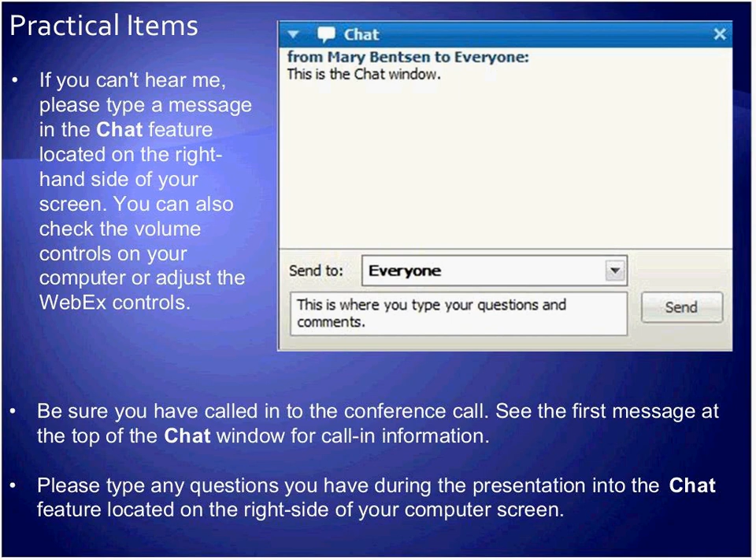Now, to get started, I'd like to hear from you what city you're calling in from today so we can get a feel for where everybody's at. I am in Peoria this morning. We have someone from St. Louis, someone from Champaign, Illinois, Knoxville Tennessee, Greenville, Peoria, Marcells Illinois, Springfield Illinois, St. Louis. Well, thank you all very much for joining us this morning from all over the state, and one from Tennessee.

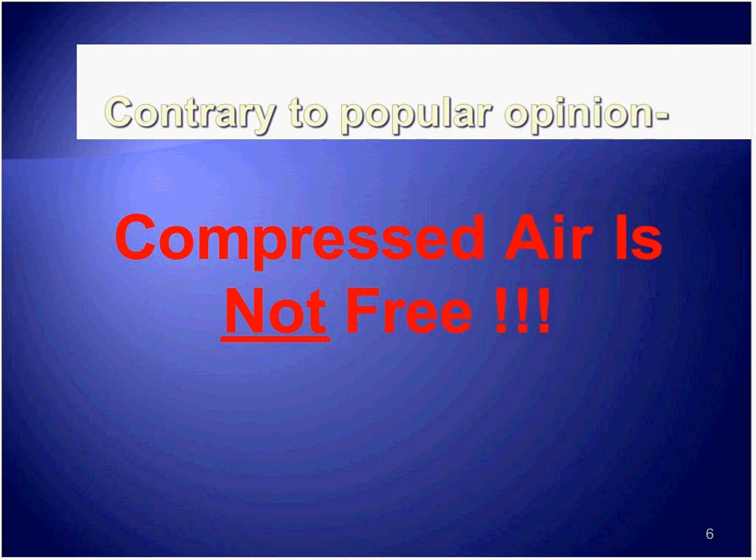See from this that we have quite a few different things where compressed air is really losing most of the input power. The greatest portion of it, at least 80% of the input power, is going to heat. So we have a problem where only 20% is delivered as compressed air. It's a very inefficient transformation of electrical energy into pneumatic power. We have a problem with that, and if we understand where it's going to heat, and if there's an opportunity to recover that heat, that's a great opportunity to really reduce our overall energy costs.

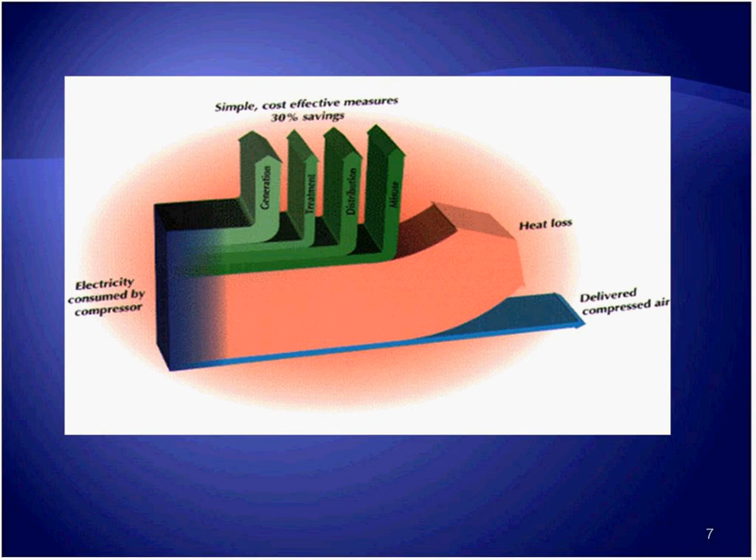You could possibly turn control over it to me. 10 to 15% of the input power gets to point of use. The rest goes to other things—we're treating the air, getting distribution pipe losses, miscellaneous losses, and so many other problems in the compressed air system. So we're saying approximately 10 to 15%, though we've had systems where it's less than 10%. We're constantly looking to reduce the consumption of compressed air and get a proportionate reduction in the input power to the compressor.

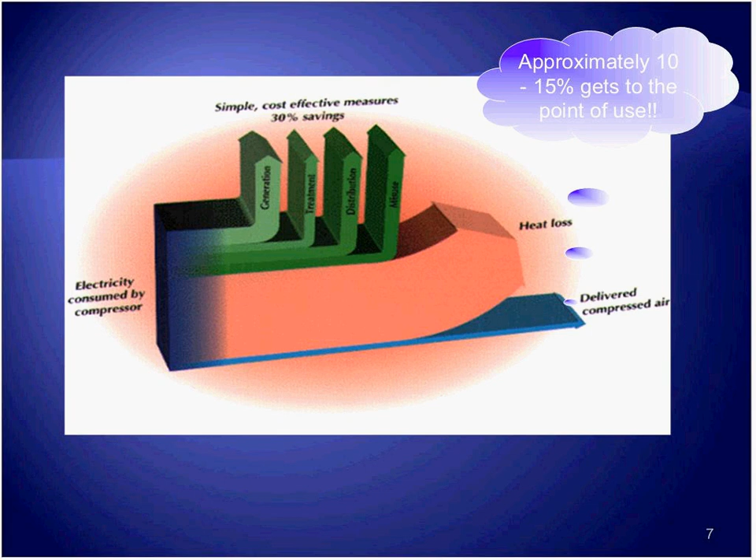When we evaluate the 10-year life cycle cost of an air compressor—this was done quite a few years ago, and we had it updated to make certain we were still on the same page. We had some problems with whether these pie charts were still accurate, so we had them done again, calling consultants actively involved in the Compressed Air Challenge. While prices have changed, the ratio of these things hasn't.

You can see that over a life cycle cost, the greatest cost is the electricity cost, which too many times you'll find purchases are based on the bottom line price, while equipment is only 12% on a 10-year life cycle cost basis, and maintenance is an additional 12% over the life of the compressor—let's call it 10 years. So we can see that the real opportunities are on the electrical energy side.

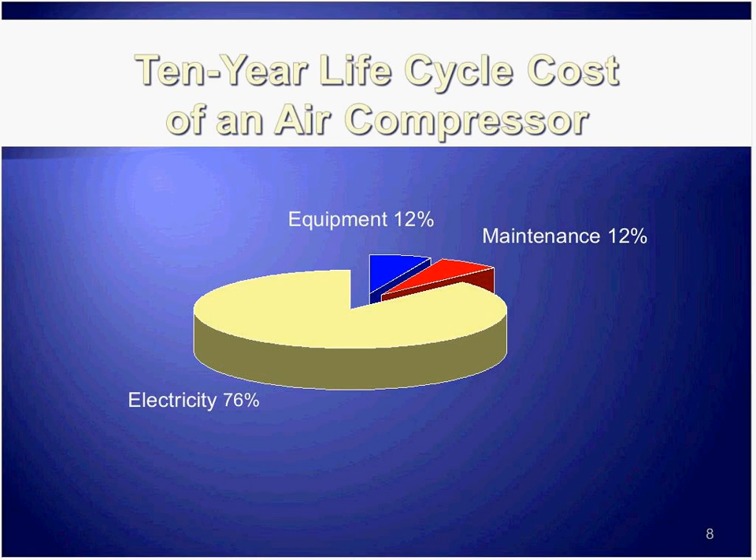Versus other sources of energy, something we look at—we've already covered that it's as low as 10 to 15%. It's a very real part of most plant operations. There's almost no manufacturing process I've seen that doesn't require compressed air, and I've seen all types of operations, whether it's an oil refinery, something that converts bauxite to alumina, a stamping plant, or tile mills. Savings of 20 to 30% are very possible.

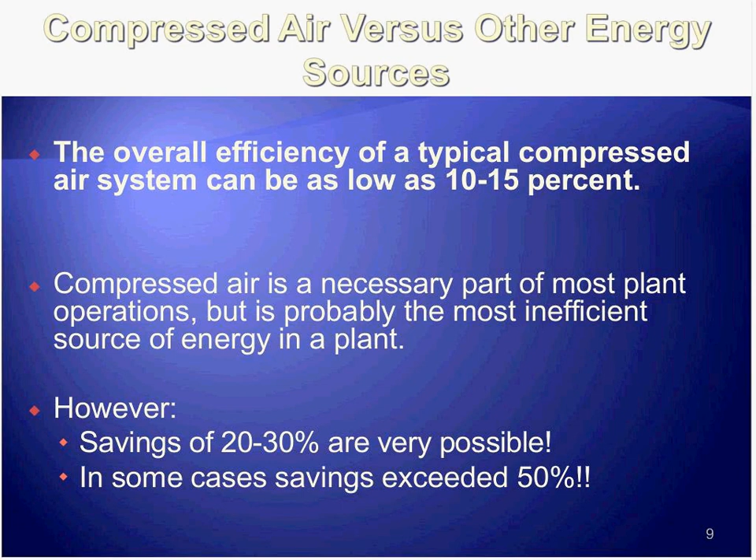In some cases, savings exceeded 50%. We have cases where a plant was running a 350 horsepower air compressor, and just by changing the use of compressed air and using another source of power, that plant today runs with a 75 horsepower compressor operating at about 80% of its capacity—so they're operating at 60 horsepower when they used to run 350 horsepower. Things like this are possible. That's an unusual case I just mentioned, but it does indicate that it's possible.

The cost to generate compressed air—in almost all of the plants I've been in and done audits, not all, but many don't know what the input power is and what the output CFM, cubic feet per minute, is. So output over input is efficiency.

For the system, we already know, as shown in the pie chart, the energy cost exceeds any other cost. Another thing to note: the annual cost will generally exceed the purchase price in the first year.

Take a compressor with a capital cost of $40,000 for 100 horsepower. At 8,000 hours of operation, the energy cost is $55,900. We used 8 cents a kilowatt hour, but if yours is more or less than that, you can ratio that number.

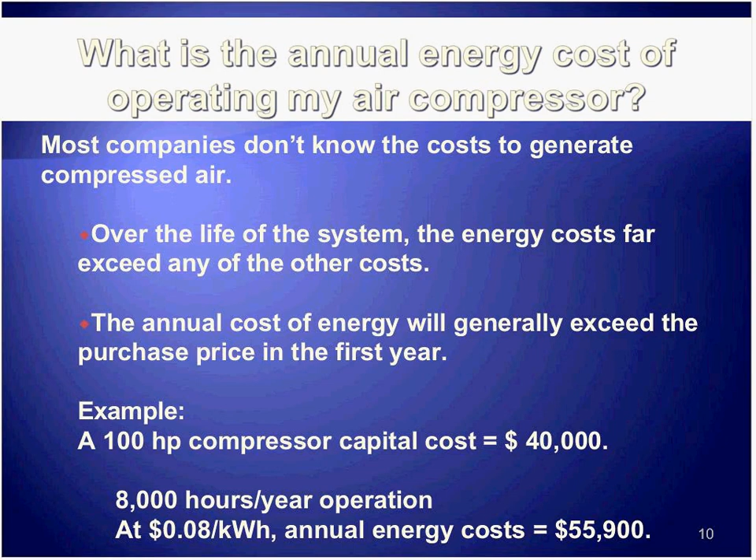It's simple—regardless of what size compressor you have, you can list what the cost is, and at the bottom we've noted again that this uses 8 cents a kilowatt hour. If you want to approximate the cost of your compressor operating at full capacity, full load, at the design pressure, 8,000 hours a year—for example, take a 100 horsepower compressor.

There's 110 brake horsepower, meaning at the shaft we actually need 10% above motor nameplate. This isn't unusual—rotary screw compressors today, almost all of them, rate above nameplate horsepower, taking advantage of the 15% service factor, so 10% above motor nameplate. So all of these costs are based on being 10% above motor nameplate. If you're operating at exactly motor nameplate, that cost will be reduced by approximately 10%.

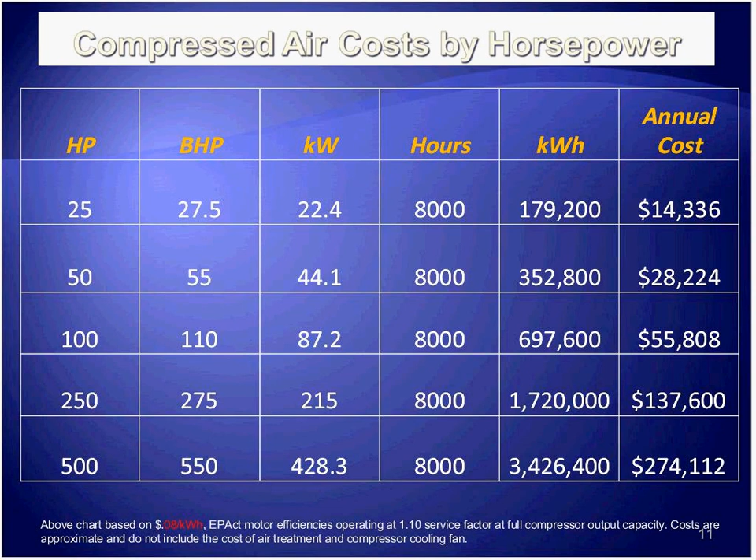So now you have an idea of what your own compressor is costing you. Understanding all these little issues we've suggested a compressor can cost, it's a measurable asset—but of course, if you can't measure it, you can't manage it.

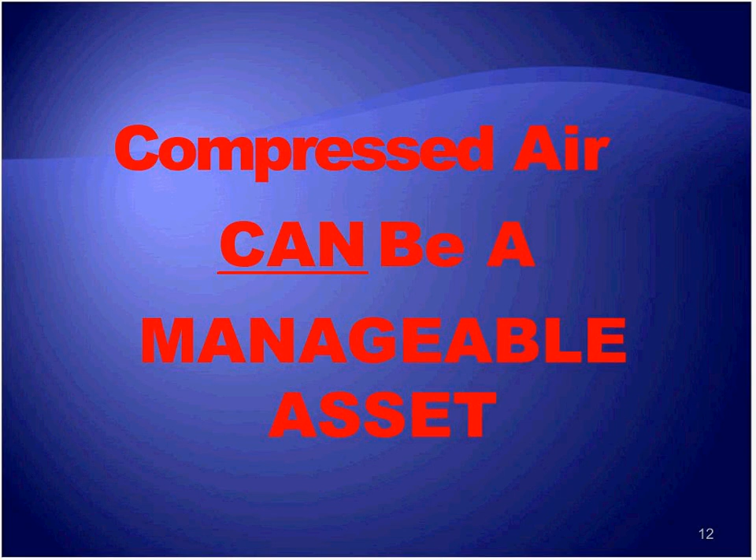On the supply side, what we're looking to do is provide stable pressure and clean, dry, compressed air at the lowest cost. That doesn't mean providing overpressure or dropping to a dew point far lower than what's actually needed. Pressure means higher cost, and dew point means higher cost.

On the demand side, we've included the distribution piping and any end-user receivers at the point of use. The goal is to minimize wasted air and avoid using compressed air for anything potentially inappropriate, while maintaining performance, including energy and reliability. You have to control and address both the supply and demand sides and make that management sustainable.

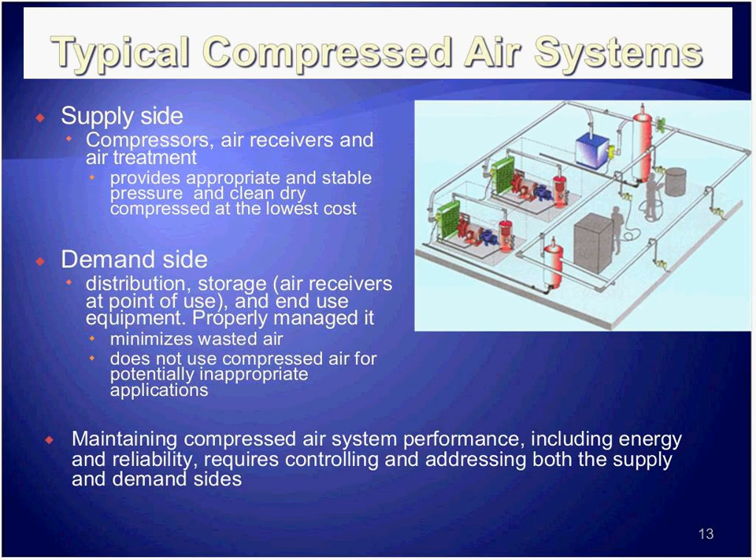The starting point, existing potential problems, and opportunities are found at every point in the system. This is not just about the air compressors—it's a complete system.

Take a look at the air compressors again—we've laid out all the different components: the dryer, the filter, the primary air receiver. That optional pressure flow controller is a pilot-operated pressure reducing valve. They're rather sophisticated, maintaining line pressure at a given point regardless of what the pressure is upstream on the supply side.

In some applications, many plants want to stabilize their pressure and keep it within plus or minus 1 psi. They're able to do this with a pilot-operated regulating valve, but it means operating at a higher pressure upstream, so you have to weigh the benefits and cost to justify it.

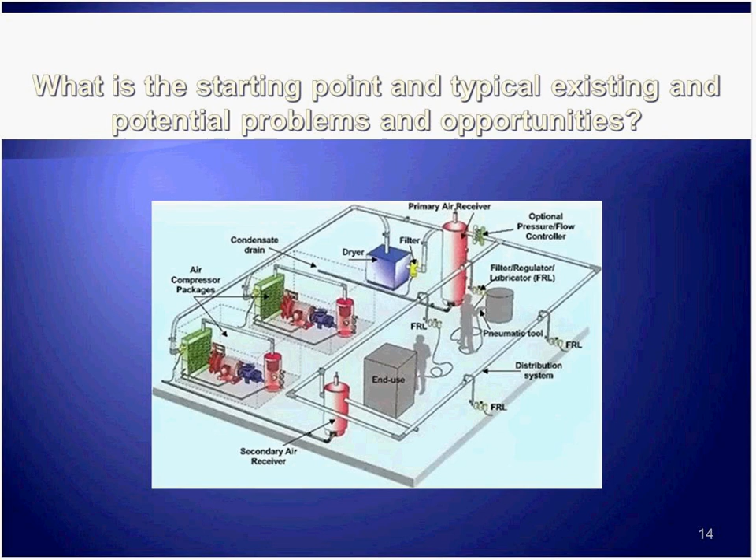This was identified as a major opportunity in the late 1990s by the Department of Energy, when the Compressed Air Challenge was formed. People didn't realize how expensive it was to produce and use compressed air. This lack of information has been a barrier, but there have been substantial improvements in the industry since then. Some of what Ameren is doing today is creating better awareness among the public—that's the biggest problem.

When people are aware of the cost, very often we'll find that consumption is reduced, and the energy cost to produce it is reduced as well. We just need more people aware of what it's costing us in the misuse of compressed air. For example, a company now operates with a 75 horsepower system that was previously running at 350 horsepower.

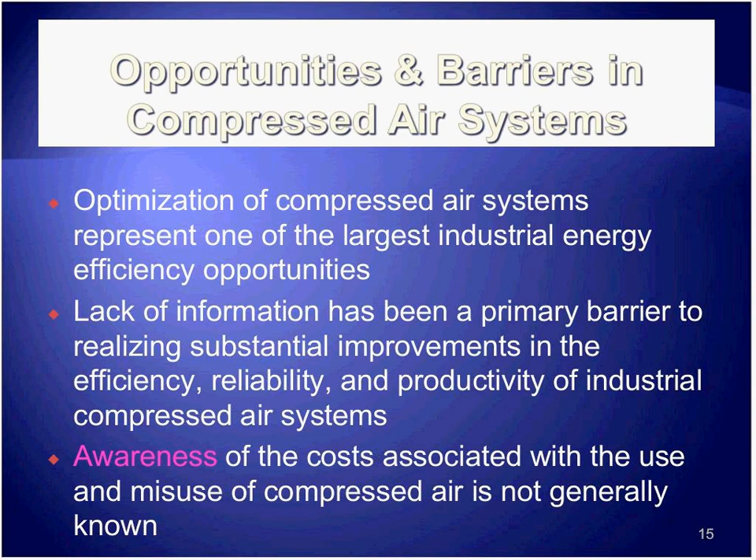If we change something, we need to see if there's a risk to production. If you're going to reduce the pressure, say by 2 psi, production may look at it askance and say, 'Wait a minute, that's going to harm my production.' Well, maybe it will and maybe it won't. So we want to coordinate with production before making any changes, telling them we're running a test to see what happens.

Lower pressure will result in lower costs—we'll get into that a bit later.

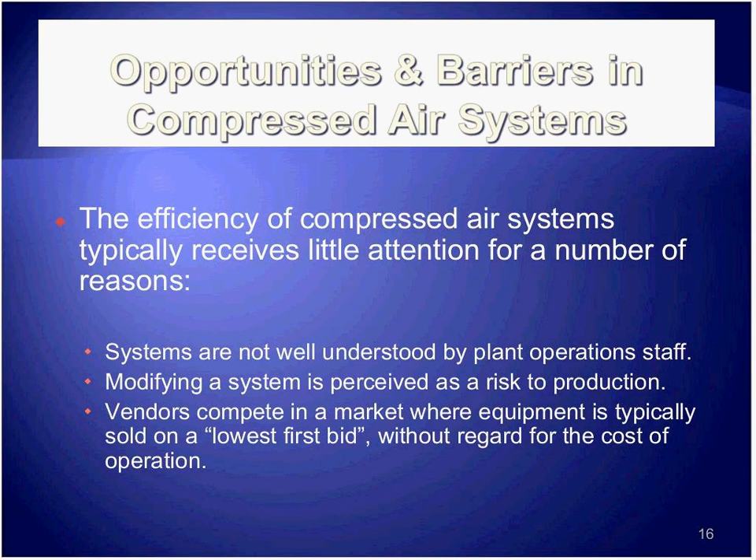You can't manage what you don't measure. Establishing a baseline before implementing any changes is essential.

Do I start with the supply, demand, or distribution? That's a good question—let's get back to the first one. If you know what kW is, the input power, and your total kWh over a period of time, and your operating hours, then you'll begin to understand what it's actually costing you. Then you can say, okay, if I implement a change, what change resulted in savings? So the baseline becomes important as your starting point before making simple changes—the low-hanging fruit.

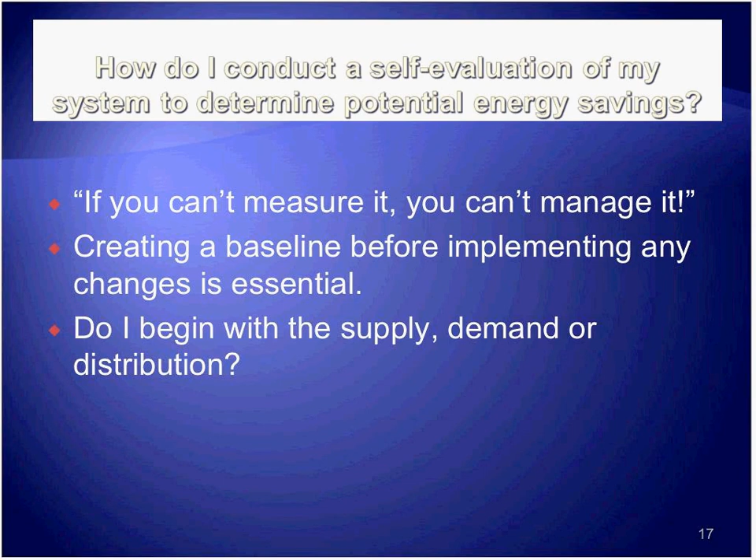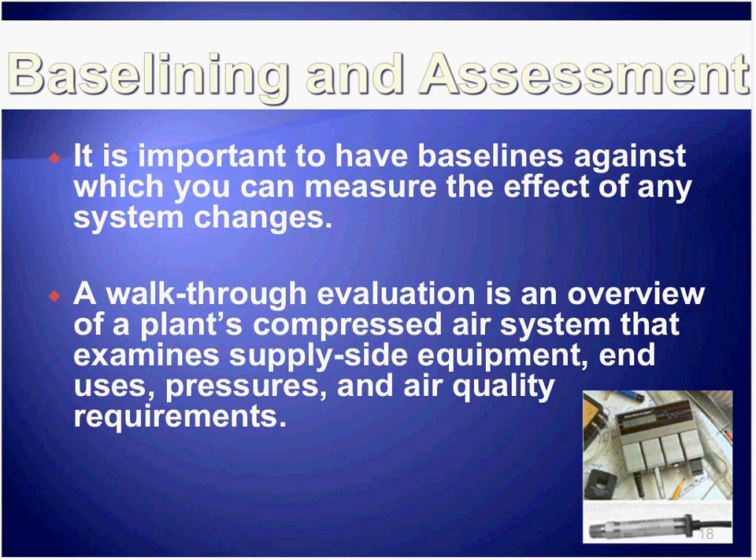For the evaluation, you can look at the whole system—the supply side, the end uses, the pressures, and the air quality requirements. In the lower right-hand corner, we're seeing a data logger, which records the information you may be monitoring or measuring, whether it's kW, CFM output, or other consumption data. We've got that data logged.

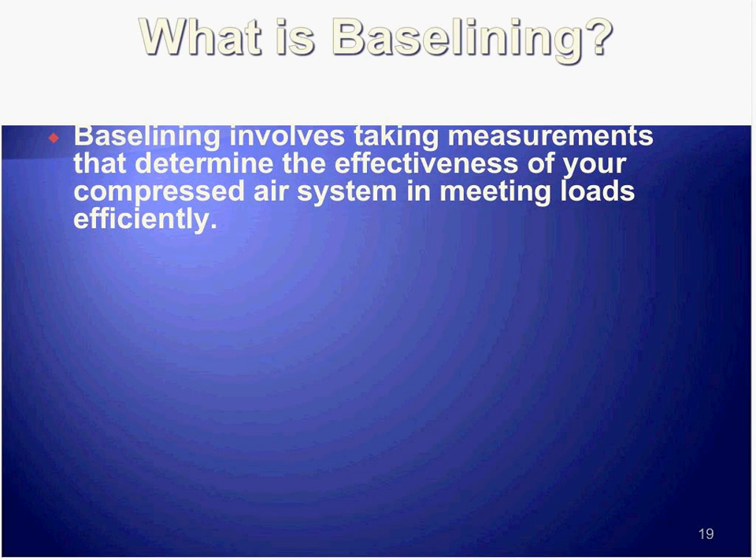We normally look at energy, whether you do it weekly or monthly, and of course it might vary seasonally depending upon the season of the year and what the manufacturing loads are, and whether it's first shift or third shift.

And flow will tell you basically what the leak load would be, though sometimes there are variances to that, and you have to know your equipment to know some of the production is kept pressurized for various reasons, even though you're not producing anything. At that point, while it may be considered a leak, it's non-productive use, you must keep the air on. There are applications like that. Instrument air might be an application I mentioned.

Before making changes to the system, the question is why? Well, you know exactly what resulted from that change. So you take these measurements both before and after.

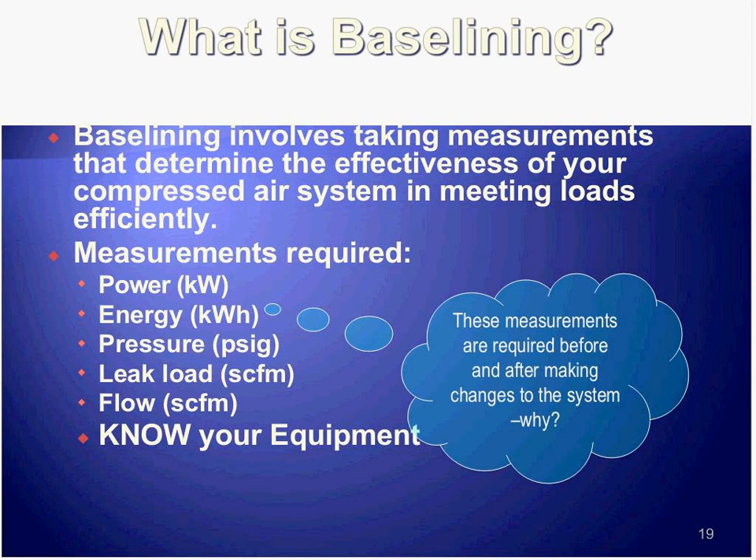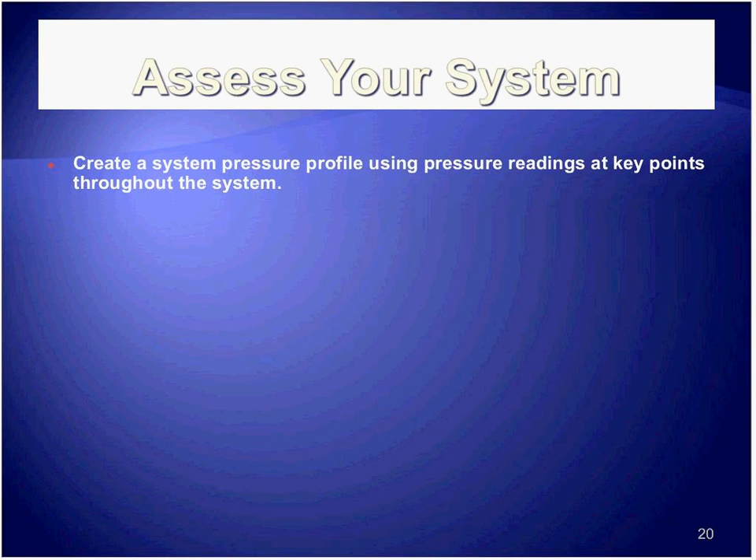The key points throughout the system - some people want to change the distribution piping because they think they have pressure drops at the end of the system, but it's not their piping that's the problem. It could be an end use where they have a clogged filter - minimizing pressure at the end use combined with a corresponding reduction in compressor discharge pressures.

So if you could find that at an end use, you were operating at an elevated pressure at the discharge of the air compressor because this end use had a large pressure drop in some of the components, if you reduce that pressure drop at the end use, could you reduce the discharge pressure at the compressor and reduce your energy input cost accordingly?

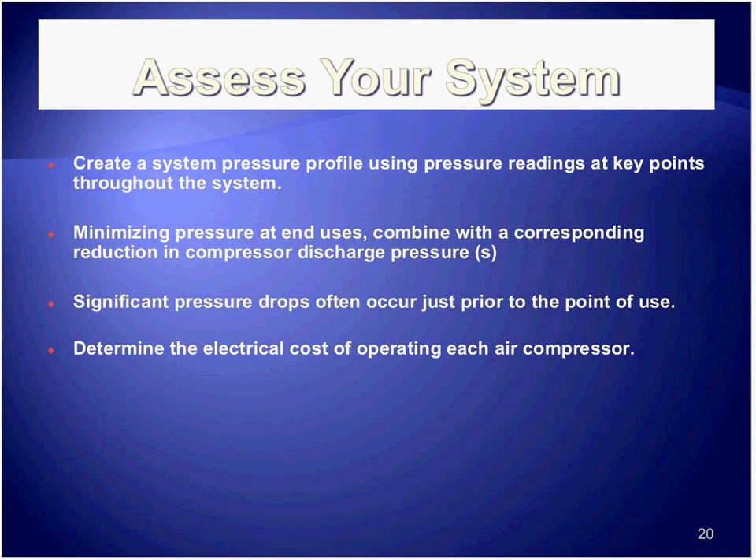They occur just prior to the point of use. We find that many of our problems are right there, right at the end use - they're not anywhere else. We call it the 'dirty 30,' the last 30 feet of piping coming into the end use, is where we find problems, whether it's a filter regulator lubricator - filter being a prime example - or some of the internal piping at a particular process, or incoming distribution of hoses or tubing or whatever.

Which tasks can most easily be done? Start with the easy ones. Then perform these tasks one at a time - measure the effects of each and see what the effect is on reducing your cost as you implement each individual initiative.

Air at the lowest possible pressure - that's the rule of thumb, on a rotary screw compressor and some of the reciprocating compressors, not necessarily on centrifugals, which we can discuss at a different time - if you can reduce the discharge pressure at the compressor by 2 PSI, you reduce the input power by about 1%. If you can reduce the pressure in the system by that PSI, you get almost a 1% reduction in the consumption of compressed air for everyone using full line pressure.

Component demand - notice that this pie is really that 20% of the total input power that's converted into pneumatic power. And of that 20%, only production uses 50%. Leaks account for anywhere from 10 to 20%. I'd say in today's world, because of everything that's been written, probably 10% or less in most of the plants I've seen most recently, although there are still some that go above 20%.

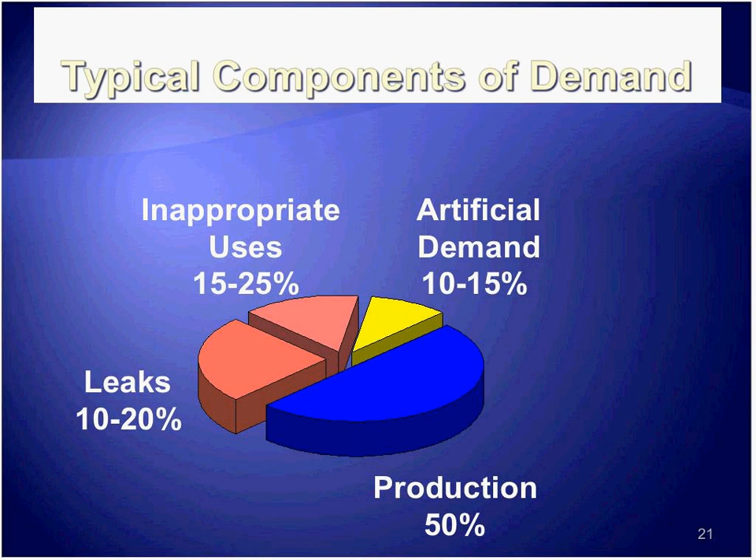Inappropriate use is 15 to 25% - that we can eliminate or replace compressed air with some other source of power. Artificial demand means the elevated pressure you have put into the system because some process or some component requires that elevated pressure, so you have the entire system operating at a higher pressure, and therefore everyone in that full pressure is consuming more compressed air than they would at the low pressure. That's called artificial demand.

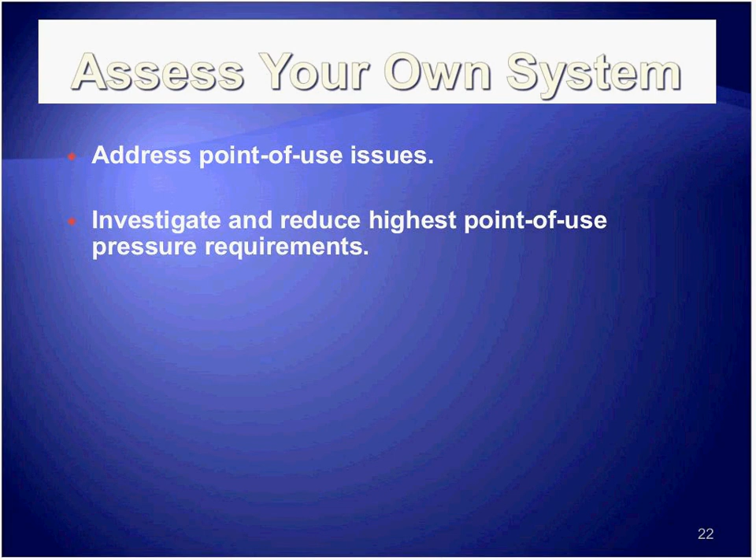The point of use issues: reduce the highest point of use pressure requirements, determine the actual air quality requirements, treat air appropriately. This means if you have a dryer giving you a minus 40 degree dew point and you only need it for one purpose in the entire plant, maybe an outside piping system, that doesn't mean the entire plant should be getting minus 40 degree pressure dew point, when a 35 degree dew point might be adequate.

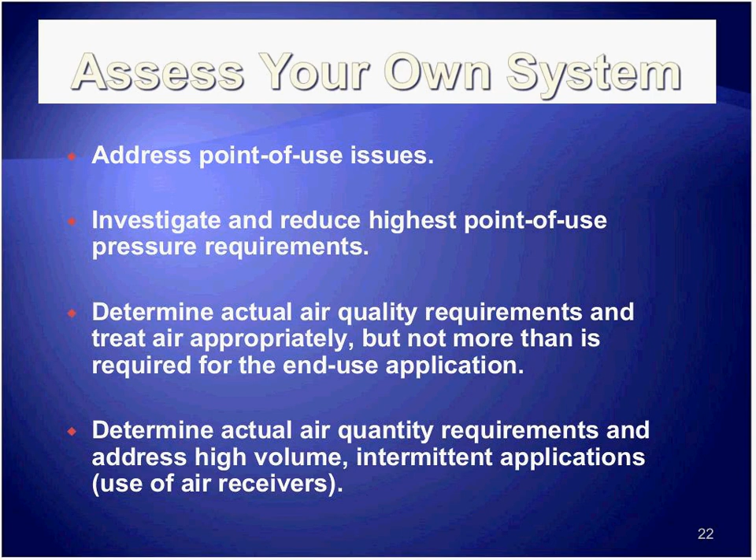Address the air requirements for high volume intermittent applications with an air receiver. If the plant pressure is used quite intermittently, once or twice during the day, maybe just adding a storage receiver at that point of use would eliminate the reduction in pressure that the entire system is seeing.

Point of use requirements, especially those that require high pressure or have a high volume requirement for an intermittent application.

Examples where gauges were changed, and somebody, because we knew that the old gauges were inaccurate, they were reading higher pressure in the system downstream of the air compressor room. So those gauges downstream were replaced, and production complained that we had reduced their pressure in the system, when in fact we hadn't. We had just fixed the gauges.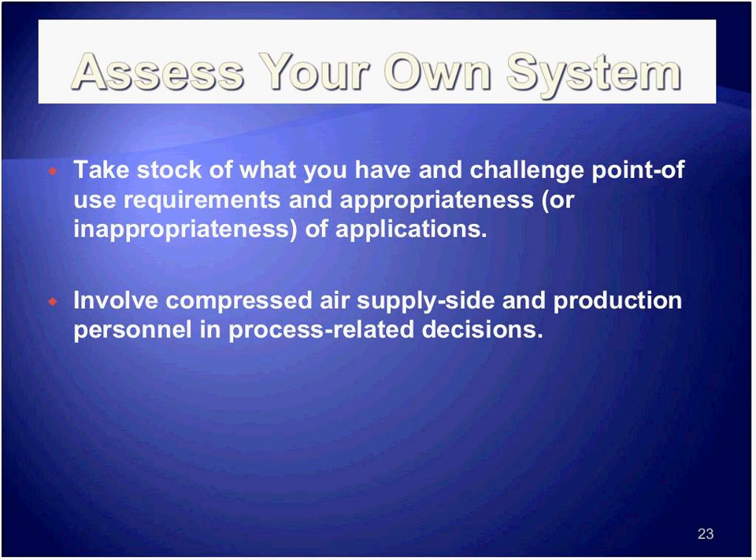Keep them fully informed. Let all management know what the dollar savings are. That's really where the chief financial officer has a key interest, and sometimes he can be the greatest partner in order to improve the compressed air system. Sustainable quality and reliability is the goal.

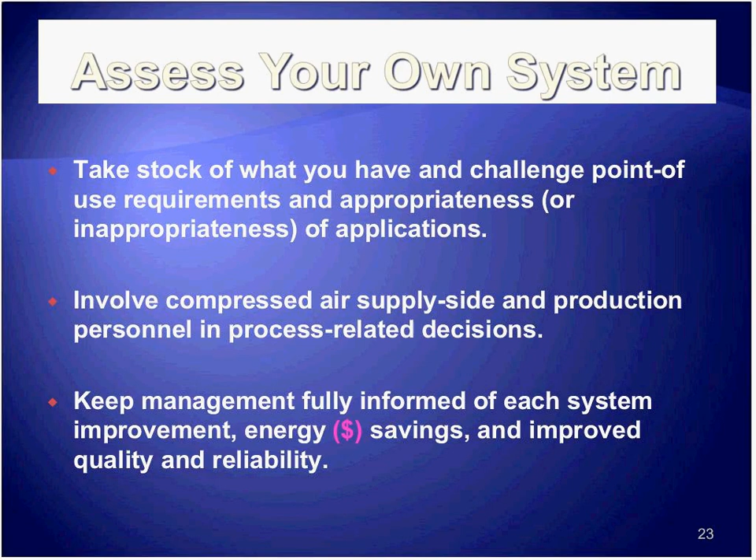This rule of thumb I just told you about: 1% lower input power to the compressor; the inappropriate uses, you fix all your leaks, not just identify them, fix them; and good maintenance procedures throughout. For compressor controls, it's highlighted here.

If we do all of these things to reduce consumption, and it doesn't result in a proportional reduction in the input power and total energy consumed, then we haven't helped ourselves to the point that we can. It's possible to reduce air consumption 10% and get only a 3% reduction in input power, depending upon the type of controls you have on the compressor.

So make sure that, to the extent possible, the controls are always readjusted every time that you have any kind of a change. You may want to call in your compressor supplier, or it's possible you can do it yourself.

Adequate storage, meaning the air receivers, as we stated a few moments ago, especially for high-volume intermittent applications. There are other methods as well.

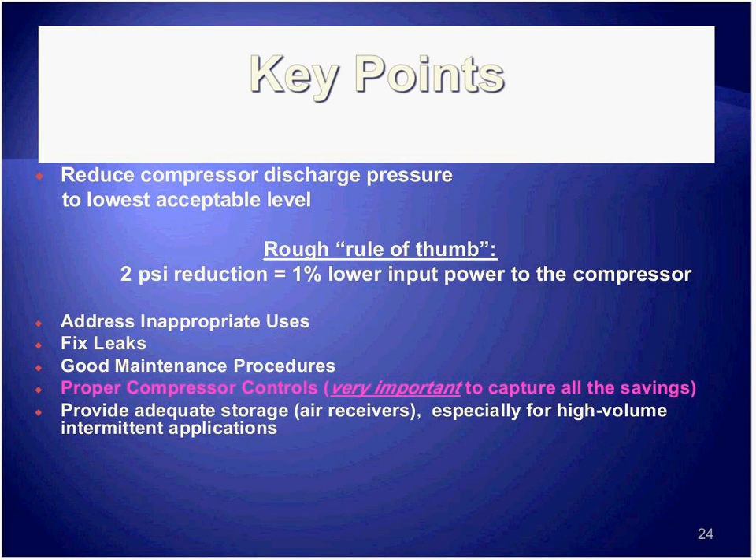Leaks. I've probably seen magazine articles written about leaks, and some of the rules of thumb: low pressure means less leak flow. Leaks mean you should minimize the supply pressure. Unregulated end uses will use more air when pressure increases.

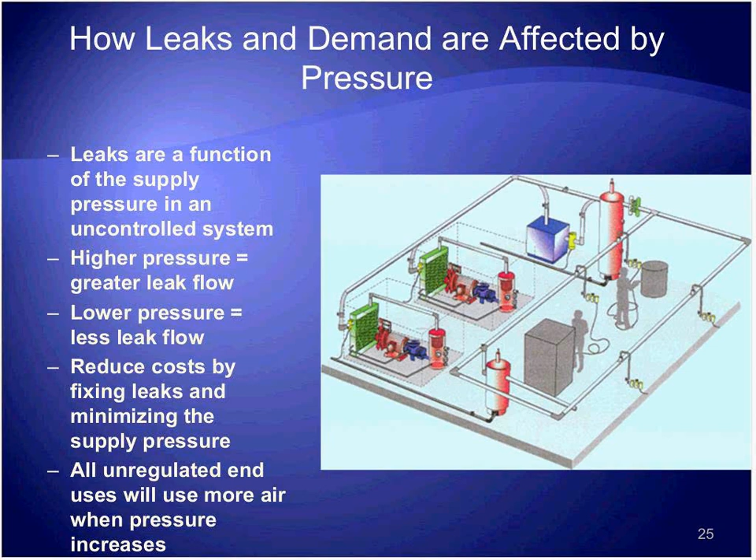This tabular form, the purpose of it is to show that at the pressure, for instance, if you go to 125 psig, 126 CFM. Now, a perfect orifice—very few things are perfect in life—and most leaks do not occur in a perfect orifice. They occur in many different shapes, but a leak equivalent to a quarter-inch orifice would consume 126 CFM. Yet if we drop that pressure to 100 psi, the same orifice consumes only 104 CFM. At 90 it's 95, and at 80, 85 CFM.

By reducing the pressure in the system, the air compressors don't know whether they're feeding a series of many orifices or feeding all the processes that require compressed air. So by reducing the pressure to the system, across everybody using compressed air, you'll find that's the reduction we're able to get. If you can reduce from 100 down to just 90, you really reduce consumption by about 9%.

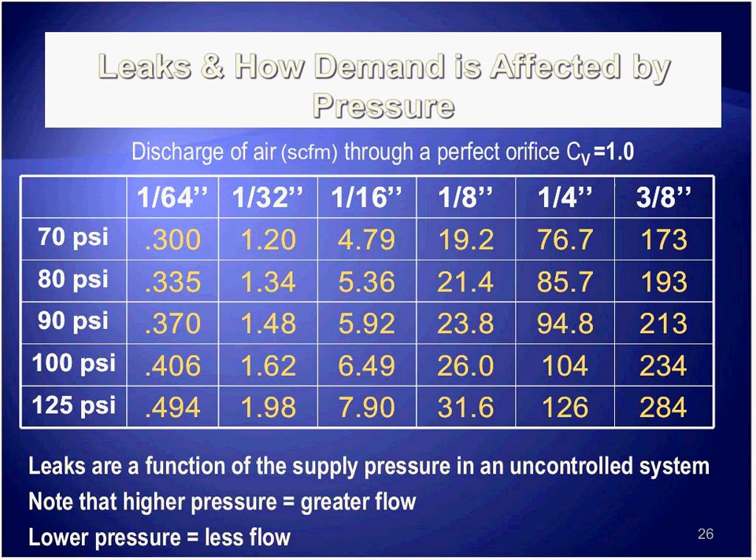That's cost at 8 cents per kilowatt hour.

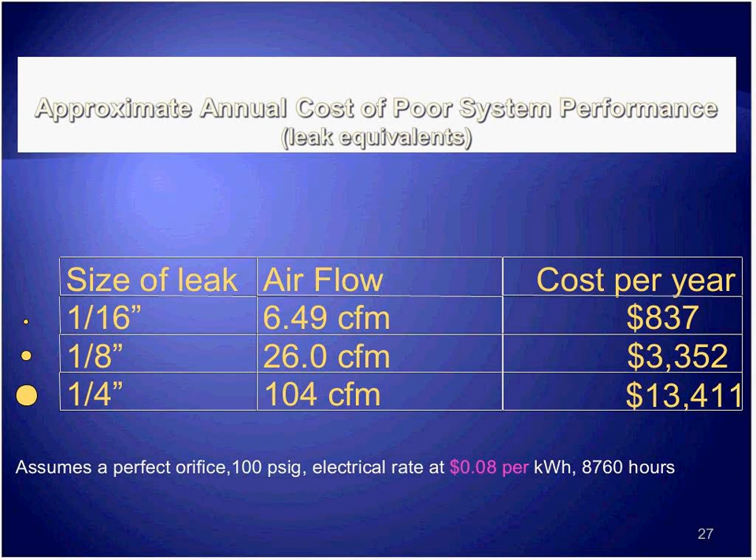They told me... $13,411 is more than your yearly pay, but I'm not so sure of that.

Did you laugh because it isn't? I don't think so. You don't think so?

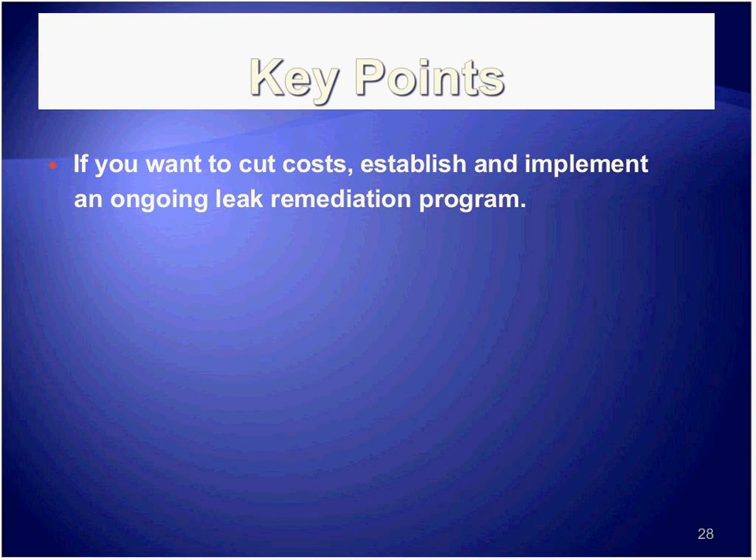Okay, if you want to cut costs, you've got to implement a leak remediation program. It's not something you do once and it's over, that's the end of it. It's ongoing. Production will always tell us where we have leaks, or maybe they're responsible for fixing their own leaks, but is that the main thing they're supposed to be doing? Sometimes it isn't. It's not the priority.

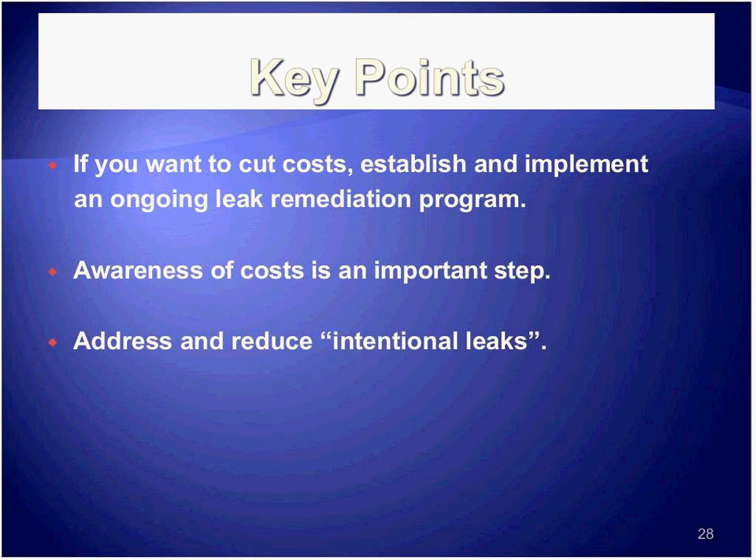Again, the awareness of costs is an important step. Intentional leaks mean somebody has taken a piece of hose or tubing and put it on a conveyor line, as an example, just to help move that product along when there was nothing wrong with the conveyor line when it was new, but something's changed, so they use the air as an assist. That's an intentional leak. And when the conveyor line stops, does the air stop flowing? Sometimes it doesn't—the compressed air continues to flow even though no production is taking place.

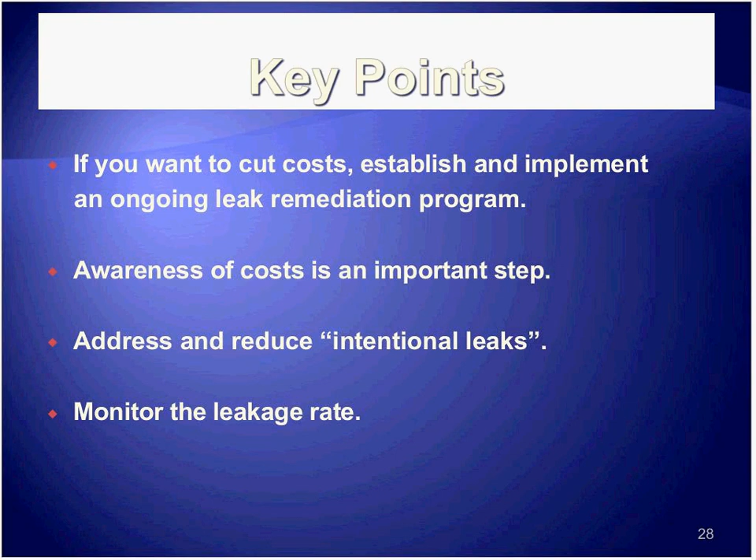The leakage rate—this we talked about.

Calculations of reduced compressed air consumption: if your compressors are not capable of taking advantage of that, sometimes we have centrifugal compressors where any excess capacity is just blown off to the roof. So you can eliminate all the leaks and you haven't reduced your energy, because all that reduction in compressed air consumption only resulted in the centrifugal compressor blowing more air off to the atmosphere than it had been doing before. So I want to make sure the compressors are controlled properly.

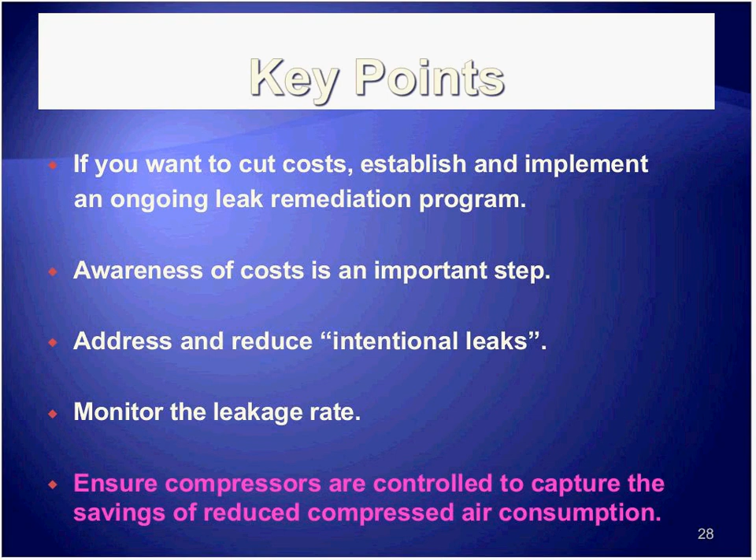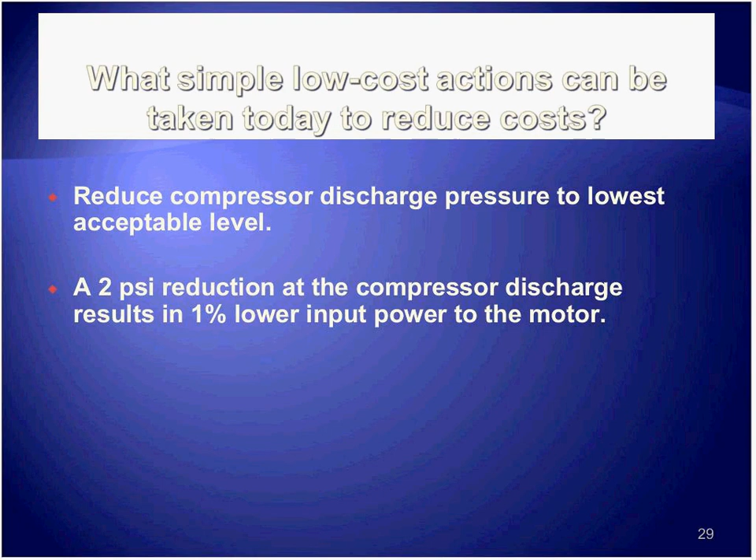Just things that we wish to continue to reinforce. At the end use, there are leaks sometimes on the supply side, in the air compressor room. We've found some plants where it's really been significant, but most leaks are at the end use.

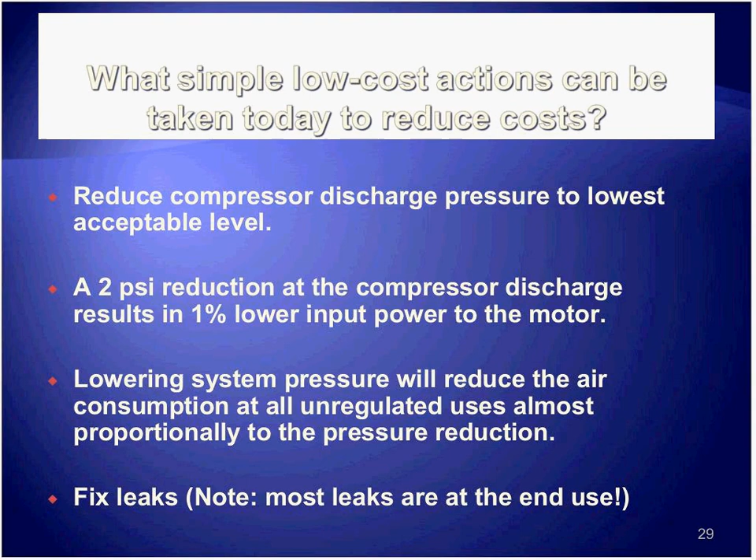Again, maintain system pressure at the lowest possible levels. Reduce leaks to less than 5% of the system flow. It's not an impossible thing. We've seen it in many plants, especially in the last 5 to 10 years. Potential inappropriate uses.

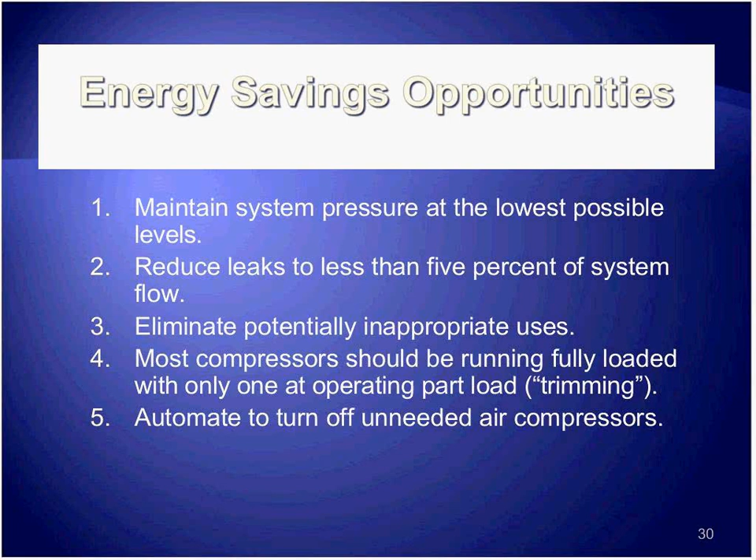A series of compressors, item number 4. Run part load, usually at part load they're relatively inefficient. What we want to do, and really the goal, is turn off unneeded air compressors. So you have 1, 2, or 3 compressors running fully at full load, full output capacity. Only one should be trimming, and that one should have good part load characteristics to reduce your energy costs.

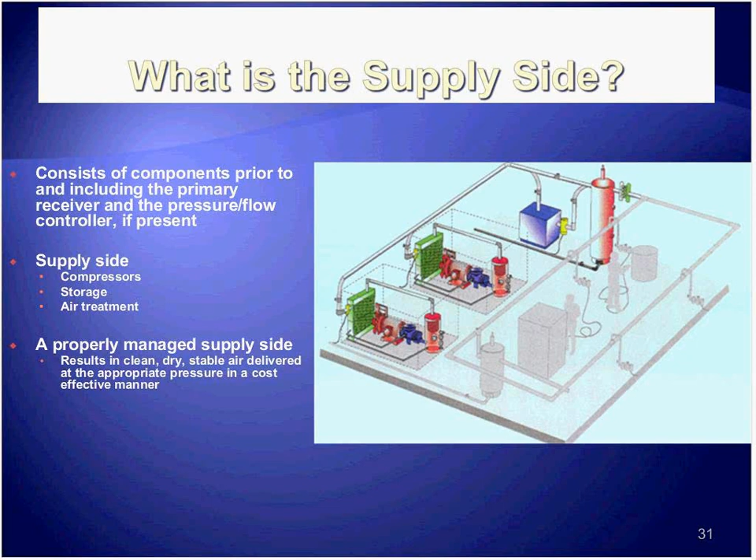We're looking at that high volume intermittent use as a worst case scenario, as an example. Centrifugal and rotary compressors were better suited for continuous base load type of service, but we've improved part load efficiencies significantly in the last 5 to 10 years. Reciprocating compressors, for those who have them, are better suited to swings in load. You can shut them off, unload them, and they've operated at a very low part load cost.

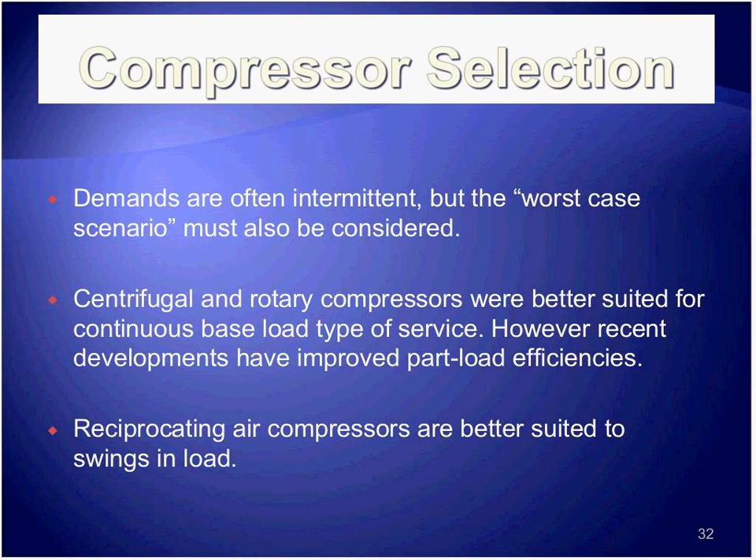So you're starting off with 100 psig in the compressor discharge into the air receiver, and you may wind up with 95 psi going out into the system.

I spoke earlier about the one application where you need air, perhaps outside the plant someplace for instrumentation, or maybe have a process outside, and that's the only place where you would need a dew point that's sub-zero or minus 40 degrees. You don't need to dry the entire plant down to minus 40.

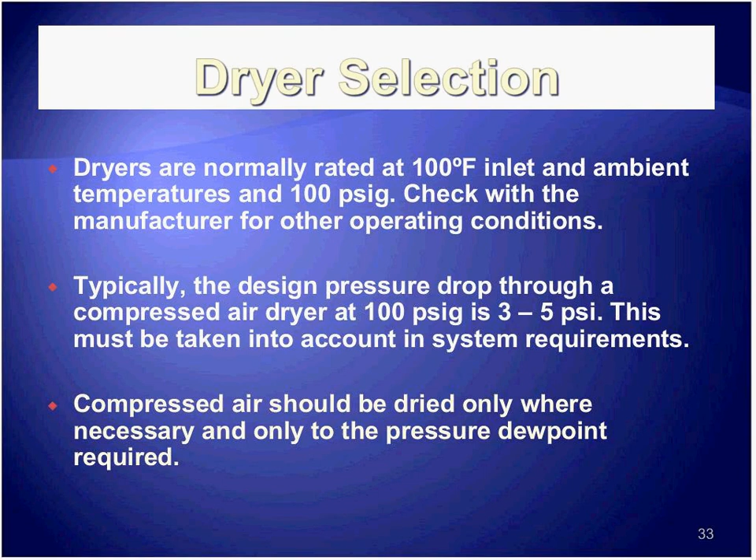The most common maintenance mistakes we find, again, you see that the first one is the end use. When we're not maintaining primary filters, we're all talking about leakage downstream of that at the process. And of course, condensate trap maintenance issues are ignored.

People take care of the air compressors. The automatic drain trap is working, but it really needs to be cleaned and maintained. Poor ventilation in the air compressor room will cause problems with motor tripping out, compressor tripping out on high temperature sometimes, not performing lubricant analysis, and not performing leak management.

So 1 and 6 are closely related. We've almost gone full circle with that, because again, most of the leaks are at the end use.

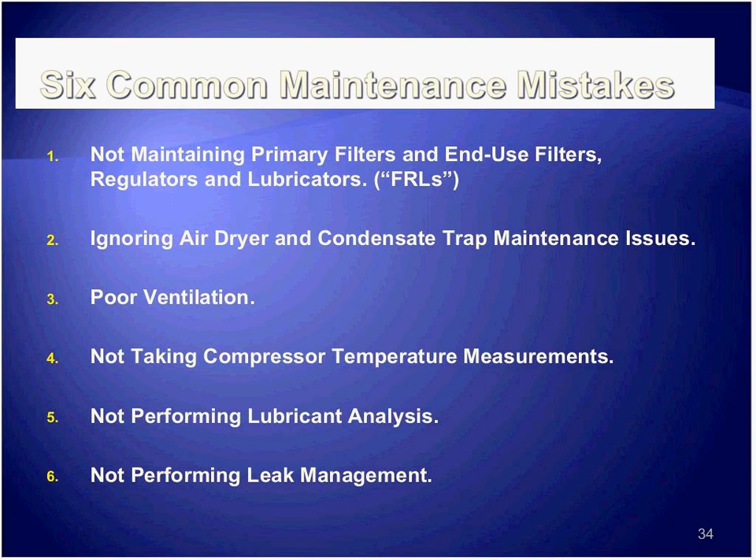Reinforcing the fact that we only want compressors fully loaded, with only one trimming. And properly sized air receivers are part of the overall compressed air system control strategy. There are systems we've seen where they have no receivers.

I was at a plant last week where that was true. In 2 systems, one of them, they're on opposite sides of the plant. One of them had more than adequate receiver capacity. The other one, where they had other compressors running, had no receiver at all.

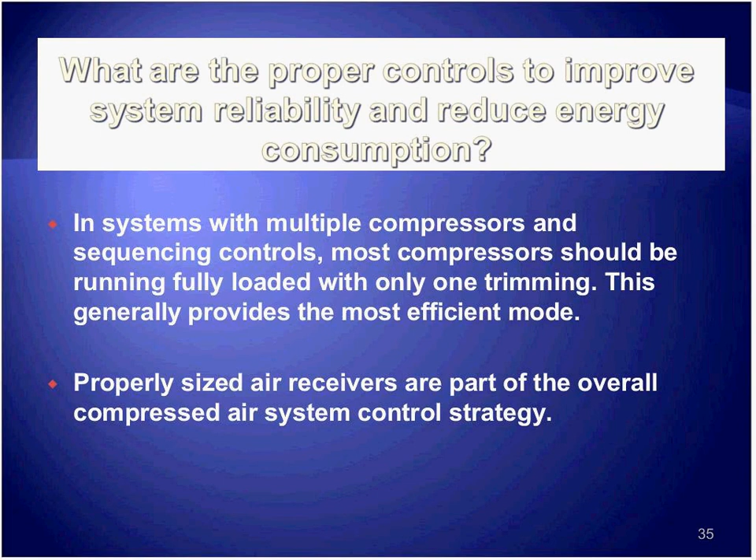That centrifugal compressor that I talked about, if you notice what happens in this centrifugal compressor, if you follow the green line down, you'll see that the demand is dropping in CFM. That's along the horizontal axis, I think they call it the abscissa.

What happens is that on the orange line, you'll find that there's a point at which it bends off to the left and becomes horizontal. But even if you're operating at 40% of design capacity of the compressor, you'd be consuming, with an inlet butterfly valve, about 80% of the full load power, because that 80% of design CFM is just blowing off excess air to the atmosphere.

If you were controlled with an inlet guide vane instead of the inlet butterfly valve, you'll see that maybe you're able to get a better turn down and not start blow-off until 70%. But then if you're operating at 30% of the capacity of the compressor, you'd still be consuming 70% of what full load power would be. So with a 1,000 horsepower compressor, you'd be consuming 700 horsepower worth, for only getting 300 horsepower worth of output air into the system.

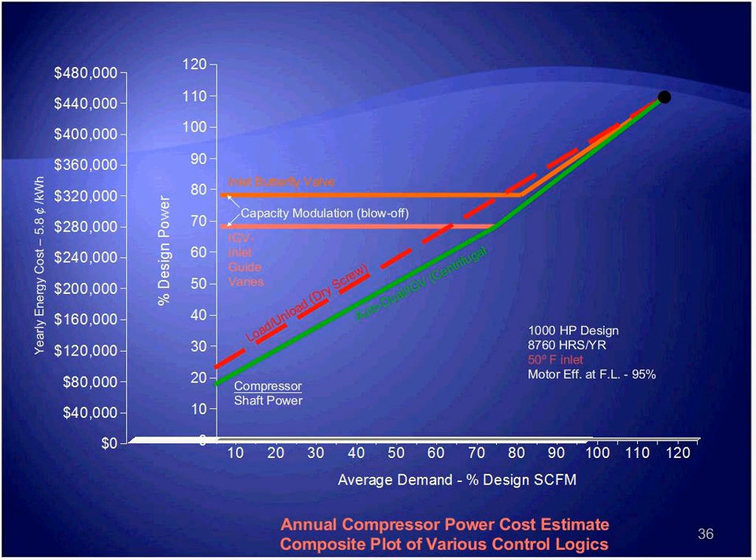So this is an example on a centrifugal compressor of why we wish to avoid what we call blow-off, which is the area in that horizontal line for the butterfly valve, and the capacity modulation showing the blow-off points between both the inlet butterfly and the inlet guide vane operation.

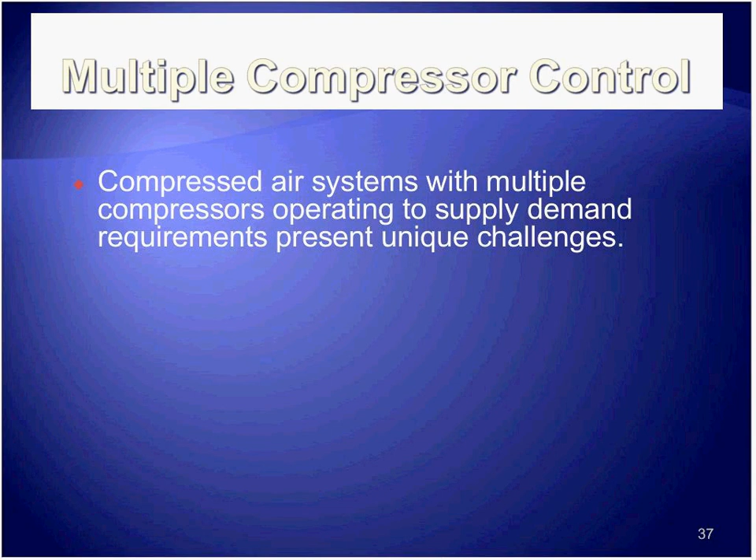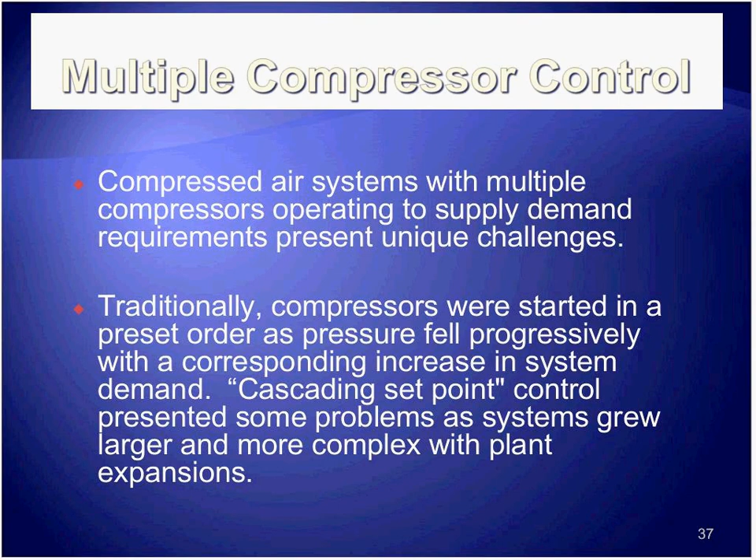Compressors started in a preset order, operating under pressure. As pressure fell, they would just start adding more air compressors, but it presented some complex problems that they really identified, and things have changed in the past few years. We talked about compressors running at part load, and we've been in plants where they ran a 100 horsepower air compressor completely unloaded, just in case one of the compressors went down.

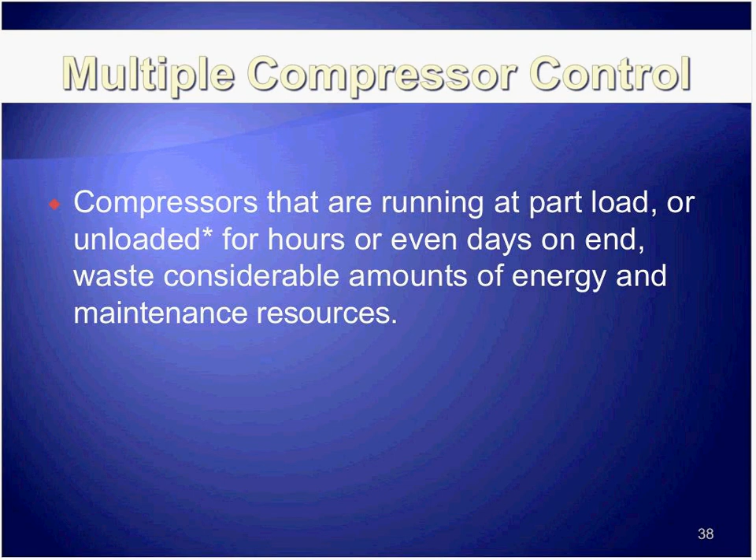We had to take care of that. That 800 horsepower, that 8 cents a kilowatt hour, it's $60,000 a year, plus maintenance on it, of course.

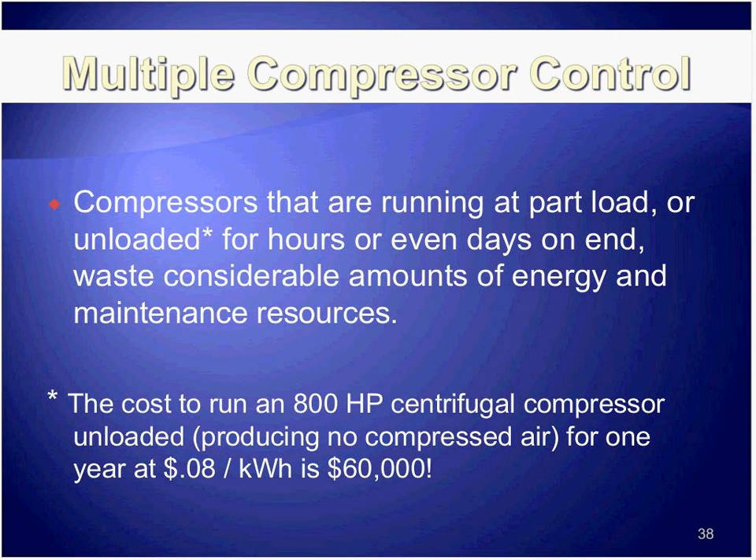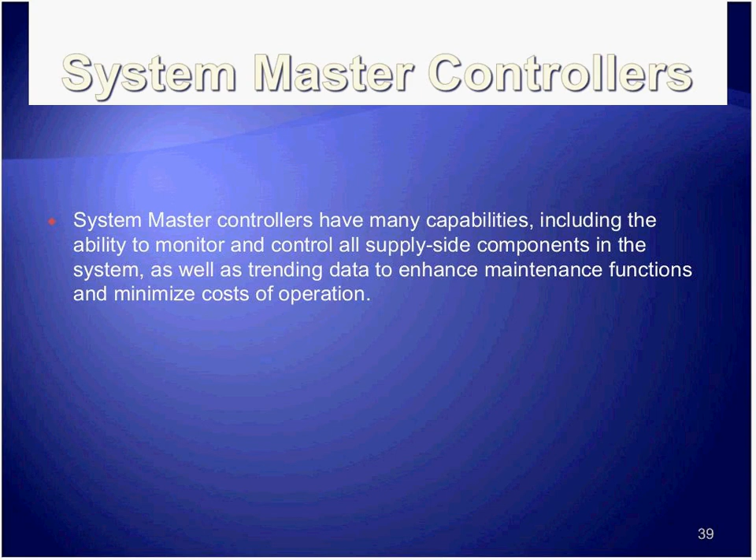We were able to monitor and control all the supply side components in the system, and use the data to enhance maintenance functions and minimize all the costs of operation.

A system interface with all brands and types of air compressors. It doesn't matter whether you have reciprocating, rotary screw, or centrifugals, and it doesn't matter who the manufacturer is. It can coordinate all of those functions to operate at the lowest input power for any volume of compressed air consumption. It can also coordinate operation of satellite compressor rooms in different buildings, and even monitor and control other utilities, whether it's chillers, HVAC, humidity, boilers—all things.

Reliable, multiple compressed air system at a sustainable lowest energy cost. The word sustainable is very important in dealing with these.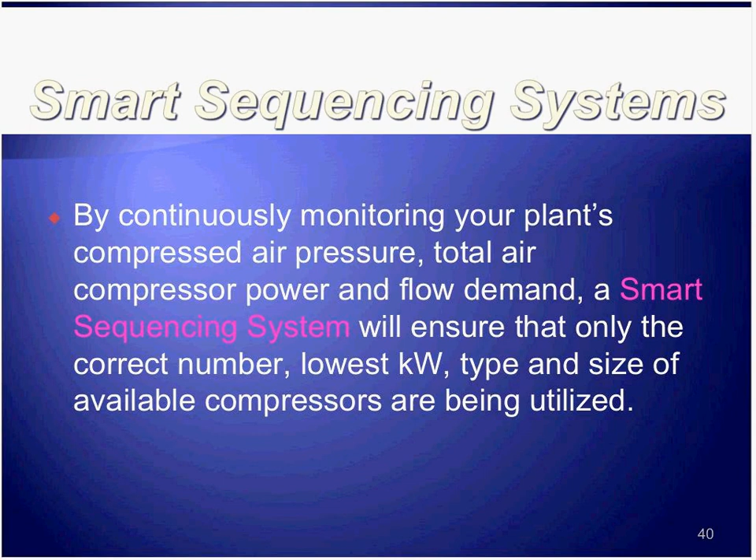You can't manage it if you can't measure it—I think I've read that before.

Say, at a different plant, looking at kW per CFM, CFM per kW: 5.4 was close on weekdays, and on some weekends it was always 1.0. The compressors kept running, but they were not controlled properly. On the weekend, when they had reduced air demand, the compressor did not react to that reduced air demand. That's in the same plant.

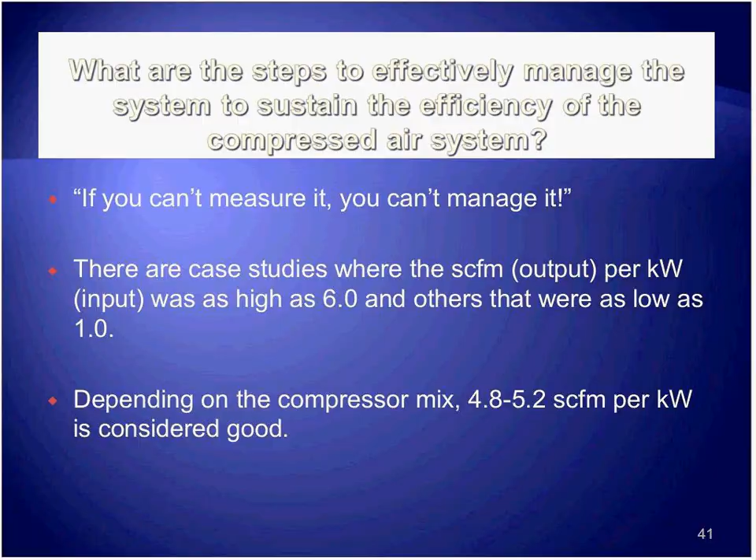This gives you status on some of the different controls that are out there. This happens to be a Scales control panel, but it doesn't matter, it can be anybody—there's quite a few different companies out there.

It gives you the status of each of the individual compressors: what the dew point is that they're getting, which compressors are running, what the kW is, what the flow is in SCFM, what the pressure and dew point are, and the SCFM per kW in the lower right-hand corner. You'll see what that was.

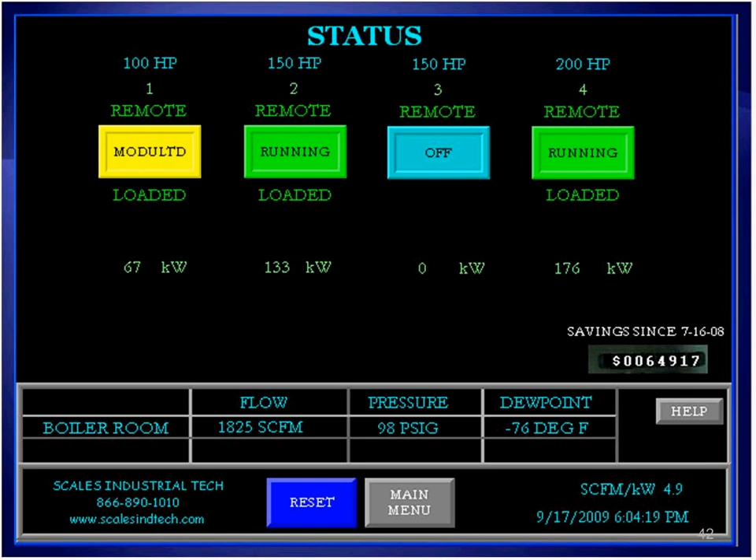So they have that on a continuous basis, and they're able to monitor it. It gives you the hourly plant demand and the trends for various jet mills within the plant, and also what their production process was. So you've got the flow rate of these, and you can also get the dollar amount for that as well, very easily.

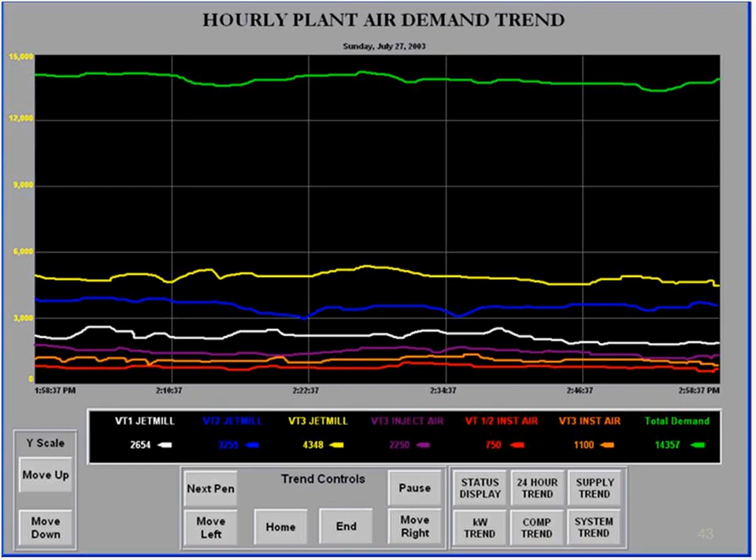Use the systems approach—we're not looking at individual components, we're looking at the total system. The demands are dynamic; they're changing most of the time. Inner systems may not change too much, but most of the process and manufacturing demands do change. So we want to use the controls, the storage, and demand management so that the system is always meeting peak requirements and operating at peak performance at the lowest input power.

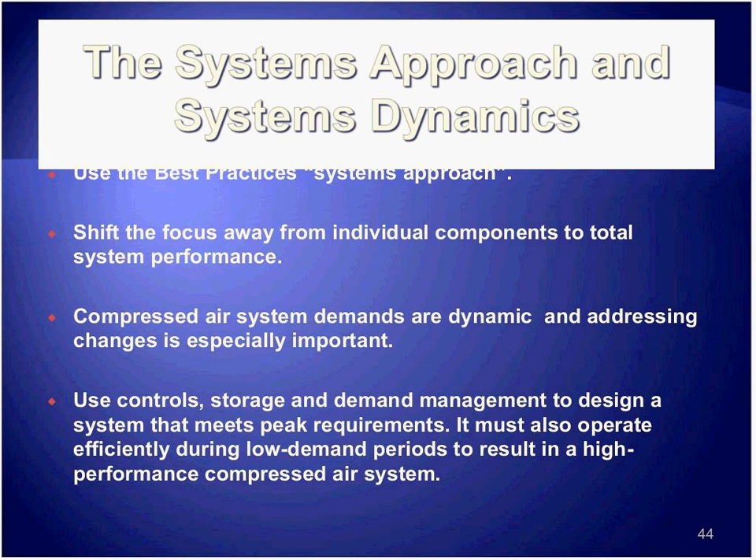Operate efficiently during low demand periods to result in a high performance compressed air system—that's what we're looking for. This, of course, means savings and production benefits, absolutely. And it's awareness that counts.

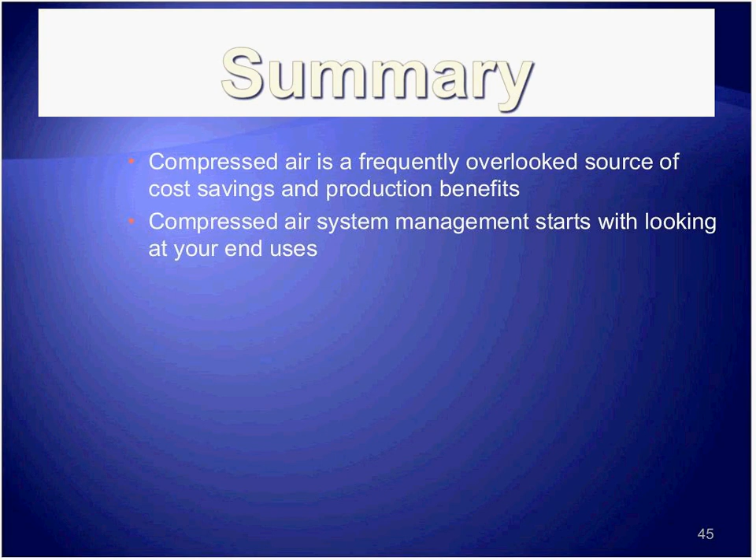I'll walk into the compressor room to get an idea of what's happening, stay there for a while, watch and monitor for a little bit. I try to get there for all three shifts if I can. Then I spend a lot of time out at the end uses.

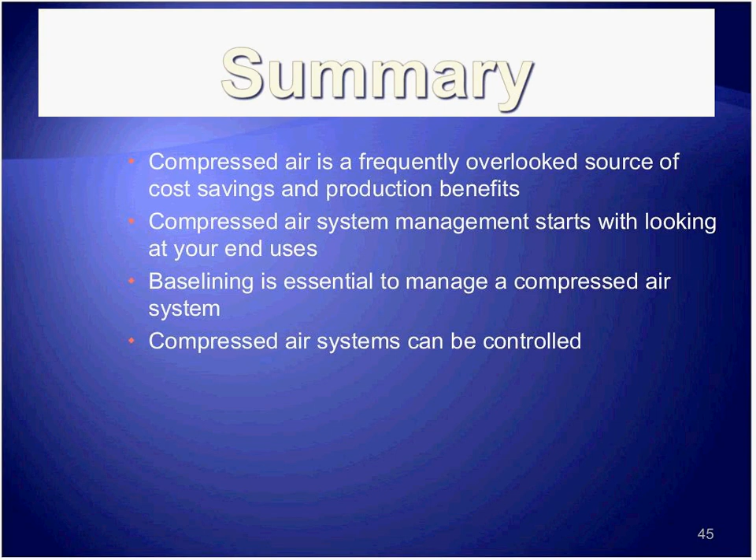We talk about where we are now, and then you find out where you're heading as you continue to implement savings initiatives. This can be controlled and maintained over time—it needs to be maintained, constantly monitoring the CFM that's being consumed and the total kW and kWh. That way you'll know if you're maintaining it.